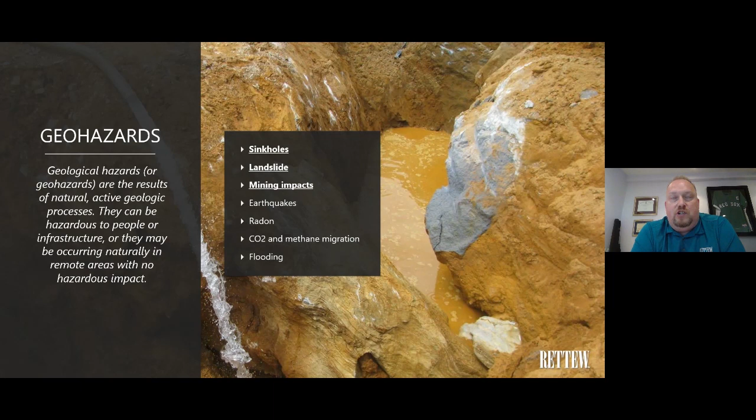And I am going to throw a fourth one in there, and that's inadvertent returns related to directional drilling. We are seeing a lot of regulatory scrutiny over that, so we are going to talk about HDDs and IRs as well. Next slide, Chris.

So why are we talking about this? Well, in typical fashion, we've got a lot of regulation that we've got to meet these days in relation to geologic hazards. Again, we're going to talk about Pennsylvania, Ohio, West Virginia, and some of the federal influences. A lot of this stuff comes out in Pennsylvania first, and other regulatory agencies tend to follow. So we are going to talk a lot about what we're seeing in Pennsylvania.

And we're seeing that in the ESCGP3 permitting process with geohazard mitigation plans. We've got the Pennsylvania Department of Environmental Protection's trenchless technology guidance. FERC has similar guidance. They call it HDD guidance, but it's very similar to the PA regs. Licensed oversight and the importance of geophysical evaluations when we're looking at some of these geohazards. Next slide.

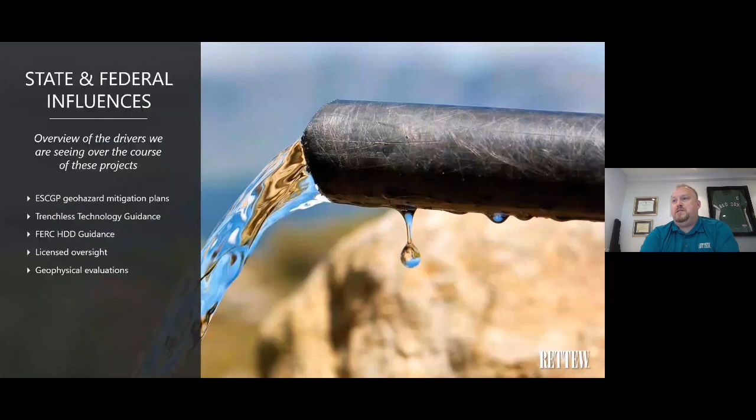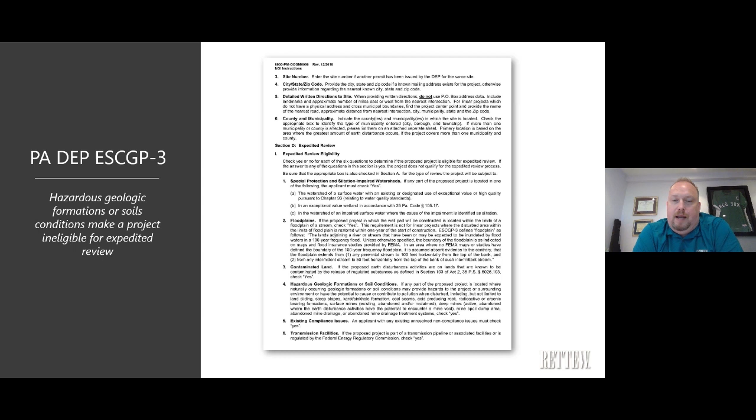So in the ESCGP3 permitting process, you start off with a notice of intent. Number 4 in that notice of intent is an evaluation of geologic or hazardous soil conditions. Slightly different language is used across this document in the FERC doc, but it's essentially the same. And in this section of the NOI for the ESCGP, we're talking about expedited review. And if geohazards are present in your project area, it's going to be ineligible for expedited review. And it's really hard these days to get most projects through the expedited review process because of all the issues we have to address. Next slide, Bricks.

Further on in the NOI for the ESCGP3, again, we talk about naturally occurring geologic formations or soil conditions, and DEP's asking you to evaluate those for your project area. If they are present, you need to include a geologic hazard mitigation plan with your NOI, and Bricks will talk a little bit more about that later. And they flat out say if you've got hazardous geologic conditions and you don't address them through the mitigation plan, just don't submit the NOI. So they're pretty blunt about that. Next slide, Bricks.

Again, I said we were going to touch on the HDD and inadvertent return piece. We're seeing a lot of this come through with current projects. Pennsylvania DEP has put out their trenchless technology guidance, and they're defining trenchless technology as multiple crossing methods that don't involve trenching. So HDDs, guided bores, auger bores, things like that. This guidance came out of a settlement between DEP and Mariner East 2 projects. It set up a stakeholders group to both look at alternatives analysis and the technical guidance for HDDs themselves. Next slide, Bricks.

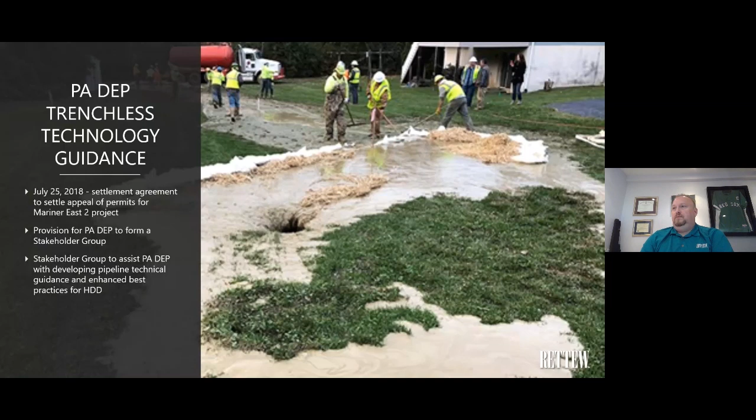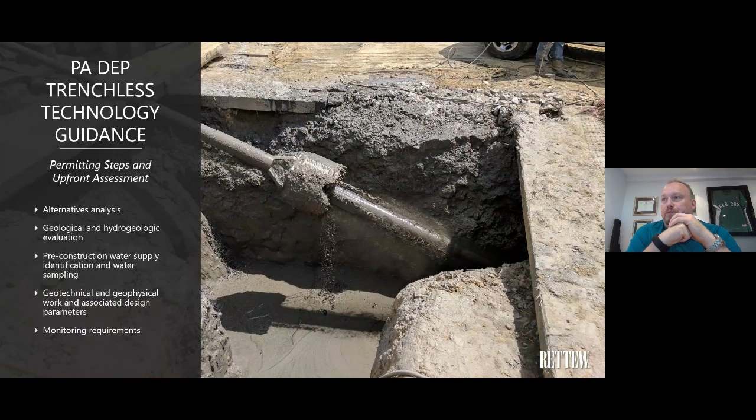So what are we seeing out of that document? Upfront permitting steps and assessment, heavy reliance on alternatives analysis, geologic and hydrogeologic evaluations, water supply identification and sampling, as well as geotech and geophysical work to kind of tie all that stuff in to the design of these. Felicia's going to talk more about the geophysical aspect of that, and Bricks the geotech, but a lot of emphasis on those items. Next slide, Bricks. Tying this in to the federal level, FERC has HDD guidance that they put out last October. It's very similar to Pennsylvania. Language is a little different, but same kind of upfront requirements. Next up, Bricks.

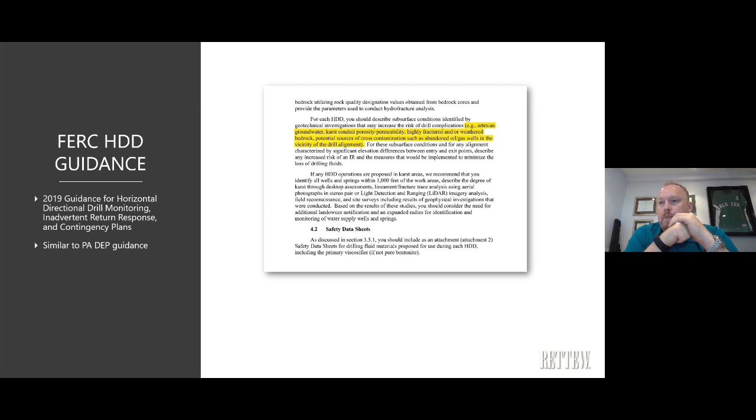One of the big things we've seen come out of this, it's not necessarily new regulation, but new focus on these items, is the involvement of licensed professionals. And we're seeing this at the state and federal level. They want to see professional geologists, professional engineers, geotechnical engineers involved in the construction aspects of these projects. Again, both at the state and federal level, we've had projects that require professionals to be on site.

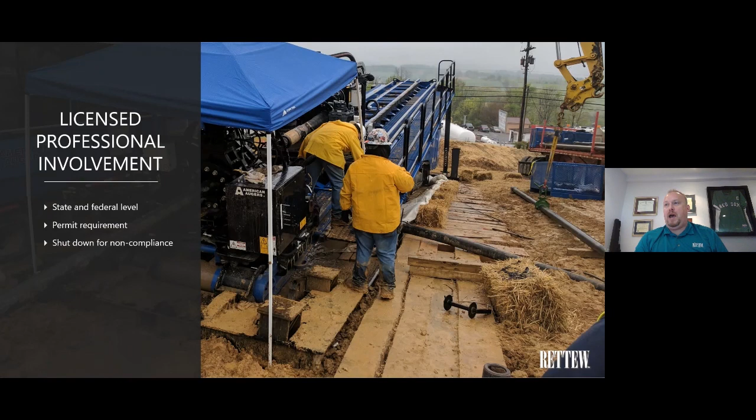We've even seen a case, it was a FERC case, where they required a PG or a PE to be on site. The FERC inspector came out. There was no licensed professional on site, and they shut the job down. So that's just something to keep in mind as we move forward from the permitting to the actual construction of these projects. Next up, I'm going to hand it off to Felicia Bechtel to talk about Karst Geohazards.

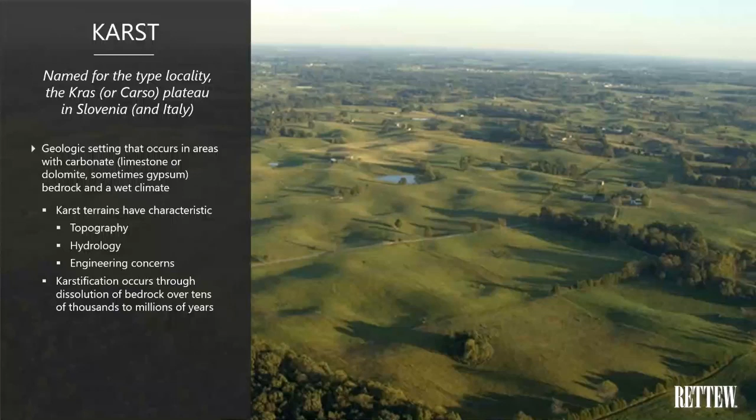And any of you on this webinar who are old enough to remember the Alka-Seltzer commercial of plop, plop, fizz, fizz, that's exactly what happens. Alka-Seltzer is calcium carbonate, and when you drop it in water, it fizzes away very quickly because it's designed commercially, but it fizzes away, leaving nothing behind. And that's what happens in a karst environment. Below the soil overburden, we have rock that's being dissolved by infiltrating water over thousands to millions of years.

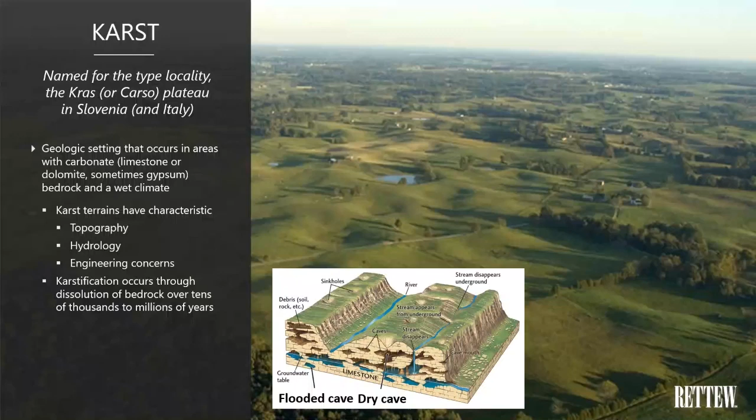or a cutaway of a sponge where over time you can get so much dissolution that you don't have just cracks in rocks that are slowly getting bigger. You can develop actual underground rivers. And this is the only situation when someone can truly realistically talk about underground rivers. They don't exist except in a karst type environment, and they can exist at all scales.

Next slide, please. So I show here a map of karst in the eastern United States, which is displayed by the black in the map. And since we're concentrating on primarily Pennsylvania, West Virginia, and Ohio in this talk, you can see that relatively speaking, there's not a whole lot of karst running through this area compared to the Midwest or the South.

However, if you look at the pop out to the right, you can see that karst, which is the beige bands following the Appalachian mountain chain, these beige bands actually intersect areas that are populated. So as we develop our cities and towns, we have to understand how to work carefully and develop carefully in karst environments. Next slide, please.

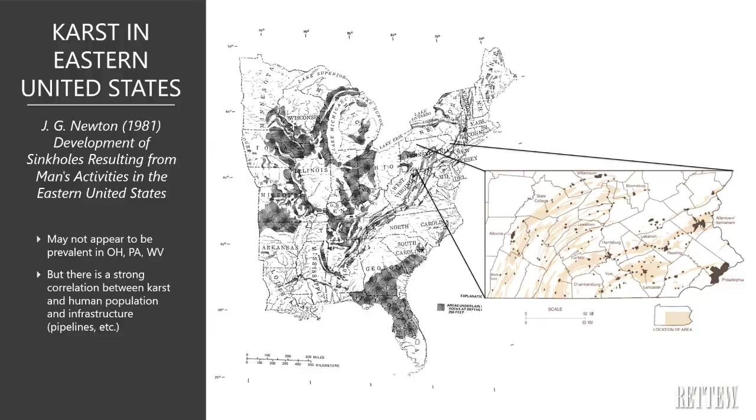So the process of karstification is actually a selective and positive feedback one. I have a cartoon for the first three panels on the left. One is just natural fractures in the rock. Rock gets cracked up, broken over time. And those natural fractures are tiny little water pathways. And over time, water flows through those pathways, dissolving the rock. Remember the Alka-Seltzer analogy, dissolving the rock and making a little cavity.

That little cavity can take on more water or more soil. So over time, as more water falls into that crack, dissolves more rock, the crack gets bigger, it can take on more water, and we have this positive feedback loop where we have more dissolution, wider fissures, and more through flow, eventually resulting in possibly an entire karst plumbing system. And this is a photograph from Kentucky, Karst Cave in Kentucky.

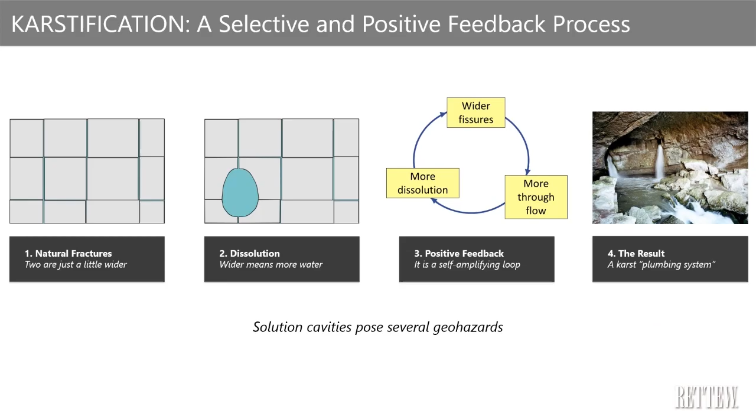Next slide, please. And these solution cavities pose several geohazards, one of them being rockhead pinnacles. So this is a picture here in Pennsylvania, the Ontelaunee Dam being built in 1926, and all of the soil burden was pulled away to develop this dam, leaving this very pinnacled rock surface. And the reason it's pinnacled is those deep fissures in between the rock pinnacles are the places where water got in and dissolved rock and made them bigger and bigger.

And they're so big, Chris can point out a couple of people for scale. These fissures are big. So you don't always have a nice, clean bedrock surface below the soil, even if you're in flatlands. So the soil overburden can hide a lot.

Next slide, please. This is a picture of a current day quarry in Pennsylvania where not all of the soil burden has been removed, but you can see the rockhead pinnacle tips sticking up. So I'm sure if the soil overburden were removed, it would look just like the picture that you see on the right from the Ontelaunee Dam. Next slide, please.

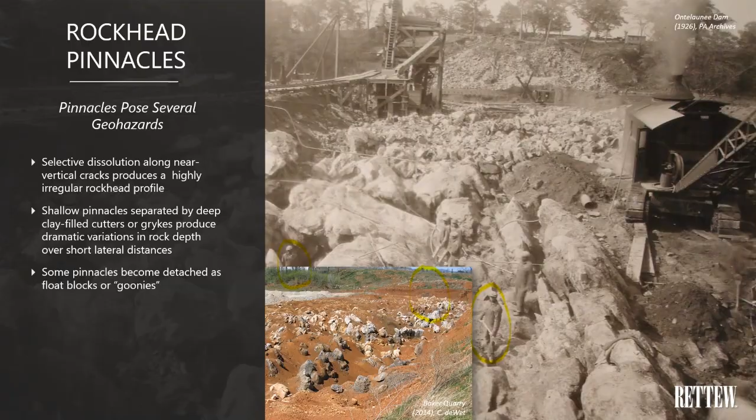So there are several geohazards that can develop as a result of karst, the first being subsidence, and these can occur in a number of ways, either by the soil overburden getting washed or flushed down through the cracks in the rock, or we can have caves developing from water infiltrating from a distance, caves developing under an area, and as the cave grows, the roof is actually growing towards or stoping

upwards towards the ground surface, and eventually there's not enough support of the soil overburden above the stoping upwards cave, and the soil and rock collapse into this underground cave. So there are a number of ways where subsidence can occur in karst environments.

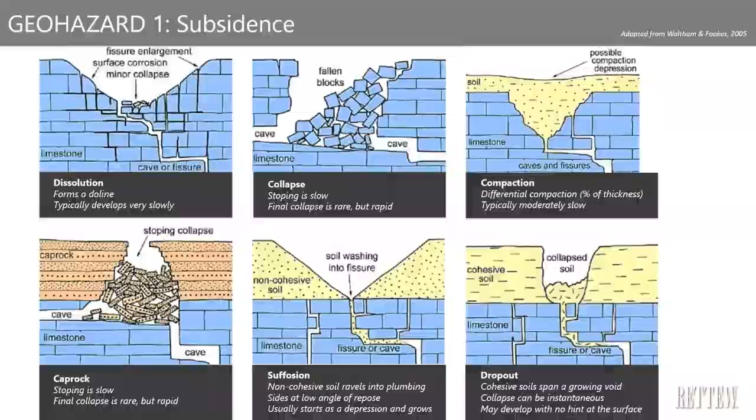Next slide, please. The second geohazard is groundwater contamination. In a karst environment, remember that water can travel fast over long distances very quickly. And this is very well illustrated in the case of Walkerton, Canada. Walkerton, Canada is a small town of about 5,000 people. And in May of 2000,

almost half the town population became seriously ill and several people died as a result of an application of sewage sludge outside the town boundaries, where normal groundwater flow calculated that it would take at least 30 days for water infiltrating at this place where they were going to apply the sewage sludge to get to the town wells.

They didn't realize they were on karst, so they applied the sewage sludge inappropriately, but unwittingly, and the people became very sick. So after the fact, they went back and did dye trace studies in wells in the area where they had applied the sludge, and there was a 26-hour travel time from a nearby well to the town well, whereas the dashed line that you see on the figure should have been the 30-day travel time from

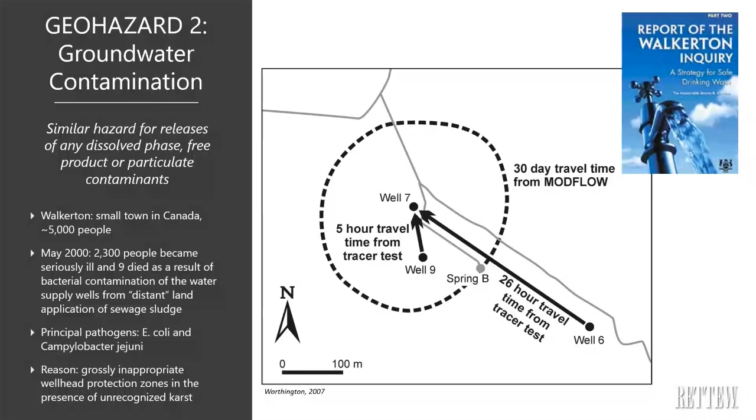Next slide, please. The third geohazard is in earth moving and support difficulties. You know, as we develop buildings, wells, all sorts of things, we're doing a lot of drilling into the ground. And if we are not doing that carefully or with enough understanding of the underlying karst environment, it can cause all sorts of problems.

We can do estimates from boring logs, how deep we think rock is, and as we drive a cast pile, we might hit a floater, or piles might dogleg on pinnacles, or if we're drilling shafts, we might go from a rock pinnacle into a water-filled void, into a rock pinnacle, into a clay-filled void, and we have very little understanding of that, except that you know to expect that when you're in a karst environment. Next slide, please.

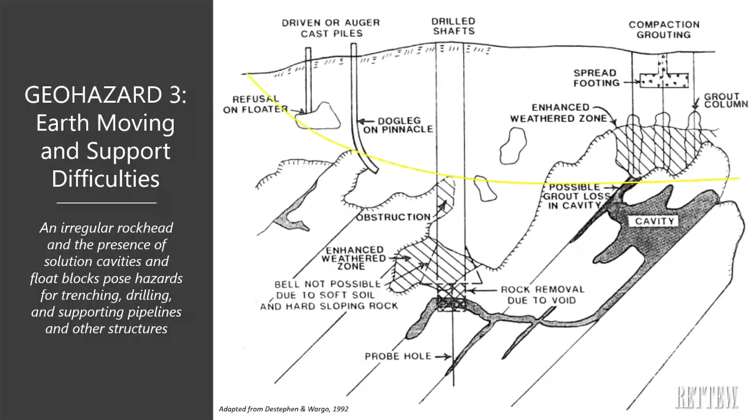We also have the same problem if we're doing horizontal directional drilling, which is the yellow line that appeared. As we do horizontal directional drills, we may hit all of these encounters. And similarly, next slide, please. If we're doing horizontal directional drilling, we may get inadvertent returns. So we're installing HDDs with drilling mud, but if the HDD crosses these fissures, the mud can make it to the ground surface and appear as an inadvertent return.

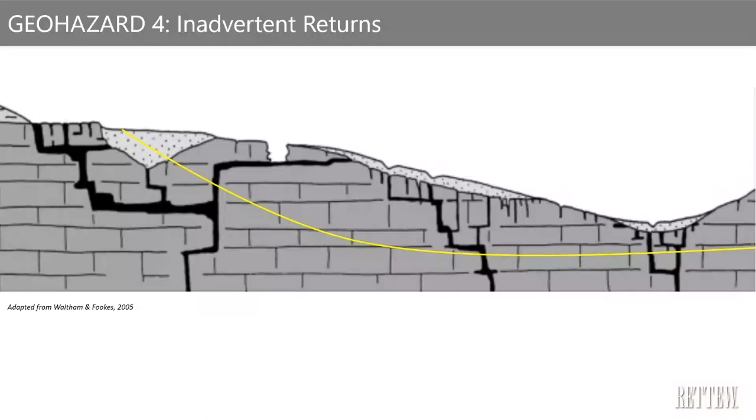Next slide, please. So in karst environments, there's a lot of uncertainty using conventional exploration, drilling wells, looking at rock cores. Here are two representative rock cores taken from a karst environment, with the soil overburden in red, the limestone rock in purple, and potential voids or fissures in black. And if we were to place these two borings side by side, whether they're 10 feet apart or

100 feet apart or 1,000 feet apart, we as scientists and engineers like to make interpolation between hard pieces of data. So we might draw lines and say, okay, well, this bed looks like this bed, and that's probably what's going on. But next slide, please. If you look at a coring in between those, we can see that we're, in some cases, dramatically incorrect. So conventional exploration does have a component of uncertainty in karst.

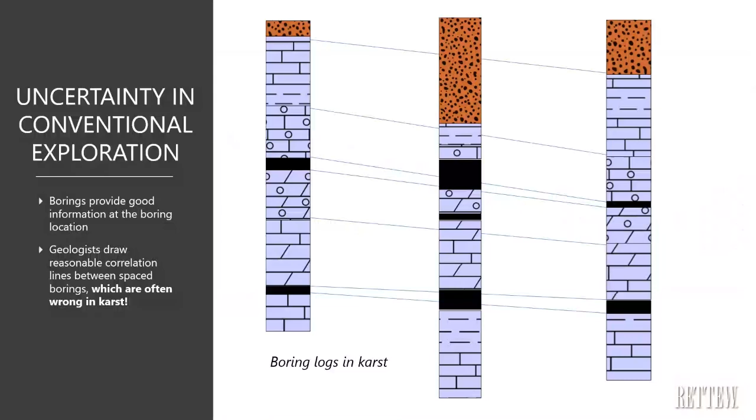Next slide, please. One of the things that we can do and should always do at the start of a project is desktop reviews. They're fast, they're cost effective, and they range from published geologic mapping and reports, karst feature databases, well log databases, historical aerial photographs, Lidar, fracture trace analysis.

I'm not going to go into any discussion of these because Chris Brixius is going to talk about this at a later time in the talk, but please know that they're out there and they should always be done at the start of a project. It can save you a whole lot of heartache in later stages of a project. Next slide, please.

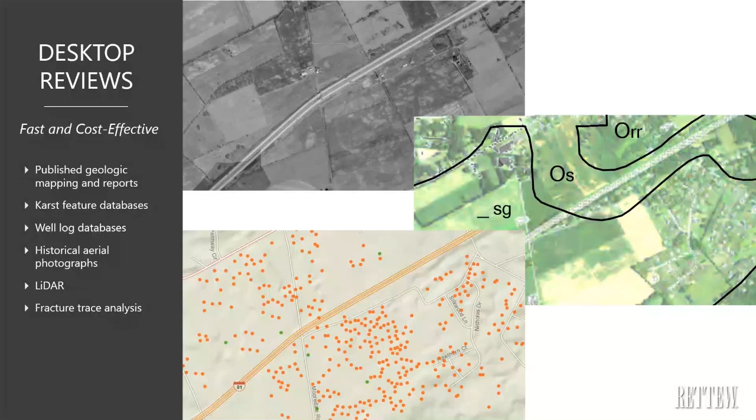Another technique that we can do, and this is my area of specialty, is geophysics, which is simply non-intrusive subsurface imaging. I try to relate it for people who aren't familiar with it as the earth science equivalent of medical radiology. We don't get the crystal clear picture, but we do get a sense of a fuzzy picture. We use a variety of techniques to look for targets underground that may be sensitive to the energy that we use in those techniques, so we can look for things like bedrock pinnacles or air or water or clay-filled voids underground.

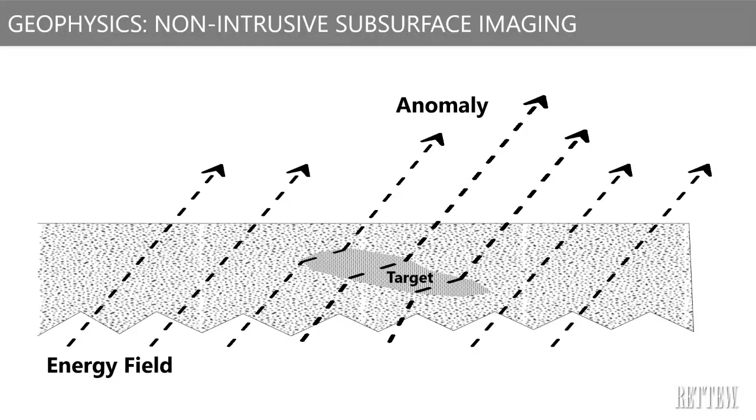Next slide, please. So there are 6 common karst conditions, and they really fall into 3 categories: a solution cavity below the top of rock, which is the left vertical panel, a solution cavity with infiltration, which is the center panel. So we've got water, we've got a solution cavity below the top of rock, and then we've got water somehow making its way into that solution cavity and carrying material with it.

And the last on the right is the solution cavity with dropout. We may not have water, but there's again a potential conduit to a cavity under the rock, and material can drop into it and cause eventual collapse. Next.

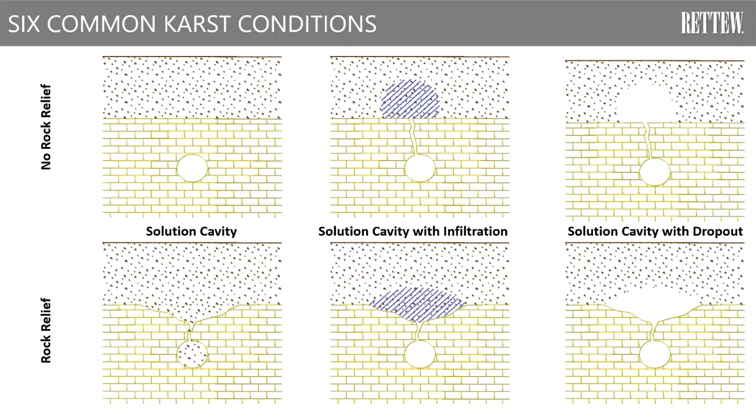So these 6 common karst conditions, depending on whether there's no rock relief, so there's a flat-lying bedrock surface with solution cavities underneath, or bedrock relief where we have the pinnacles that we described, and places where water can enter the underlying bedrock preferentially. There are a variety of geophysical techniques that we can use to look for these types of conditions. We can use microgravity to look for voids below the top of rock.

We can use spontaneous potential or electromagnetics or electrical techniques to look for places where water is infiltrating. So look for the water pathways that could lead to these. And we can use seismic and sometimes ground penetrating radar to look for areas of dropout. They may not have water moving, but they have material disappearing into underlying features.

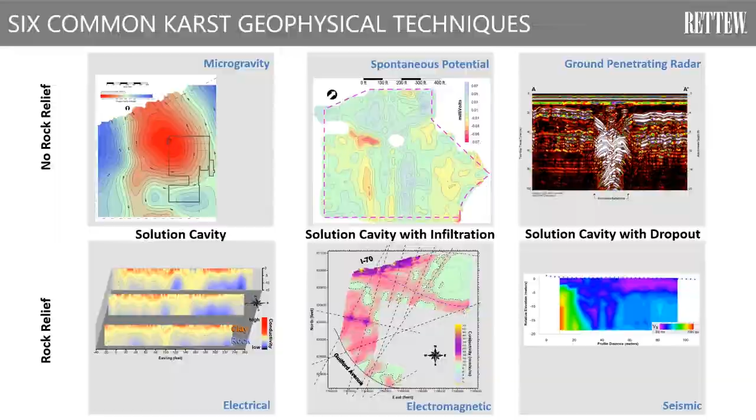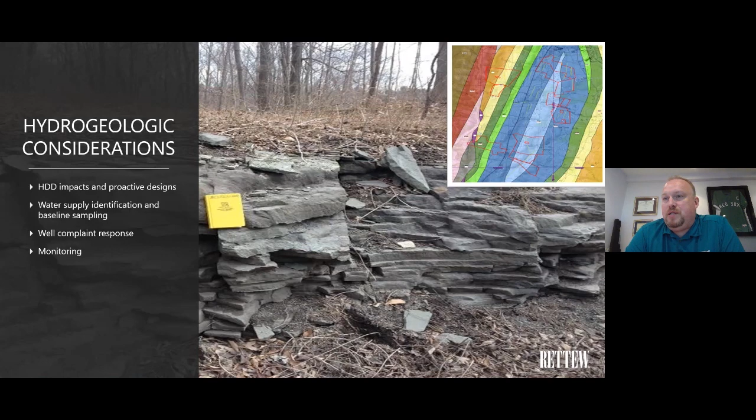So when we do a hydrogeologic evaluation, we do these for a lot of different types of projects, but the basics are the same. We're going to look at the geology and soils. We're going to look at the hydrogeology. We're going to look at water supplies and sample those before construction occurs. We're going to do fracture trace analysis.

Felicia talked about different types of geophysical evaluations we can do. Bricks will talk more about the geotech side of things. But really, we're doing all these things up front to develop a story, and that story is a conceptual hydrogeologic model that's going to help us later on when it comes time to design our projects. Next slide, Bricks.

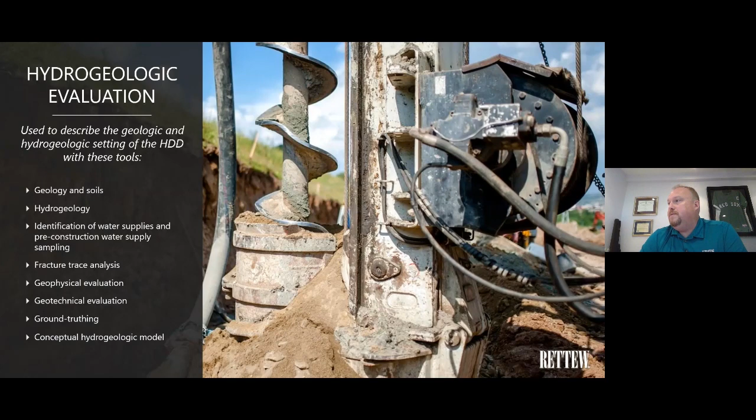So one of the big ones with respect to HDDs are identifying water supplies near your bore path. DEP and FERC guidance calls for a 450-foot buffer. That bumps out to 1,000 feet in karst environments for a lot of the reasons that Felicia just talked about. We need to identify public water supplies within half a mile and any surface water intakes within a mile downstream of a crossing.

We do rely heavily on the Pennsylvania Groundwater Information System when we're doing work, obviously, in Pennsylvania. It's not perfect, but it is a resource that we use pretty heavily when identifying water supplies. Big thing to note, construction-related impacts to water supplies are violations of permits and can result in fines. Next slide, Bricks.

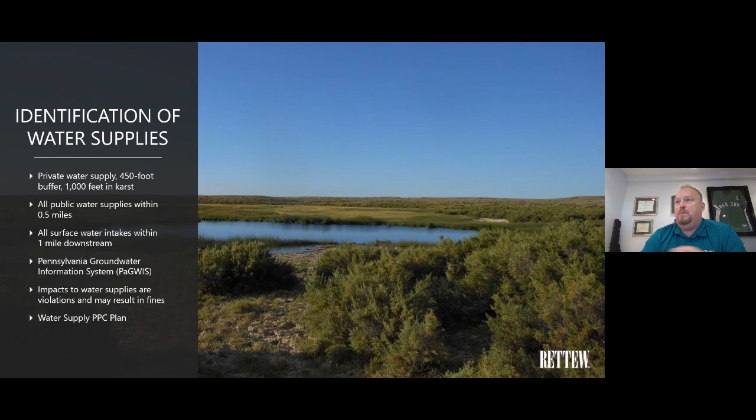So once we've identified water supplies within our project area, we're going to notify those landowners and let them know what we're doing and that we'd like to sample their supplies. We'll go out, purge that well or water source until we get stable field parameters, collect our samples, send them to a lab following a recommended parameter list, and we get the lab results back. We'll prepare a sampling and analysis report and give that to the landowner for their records. Next slide, Bricks.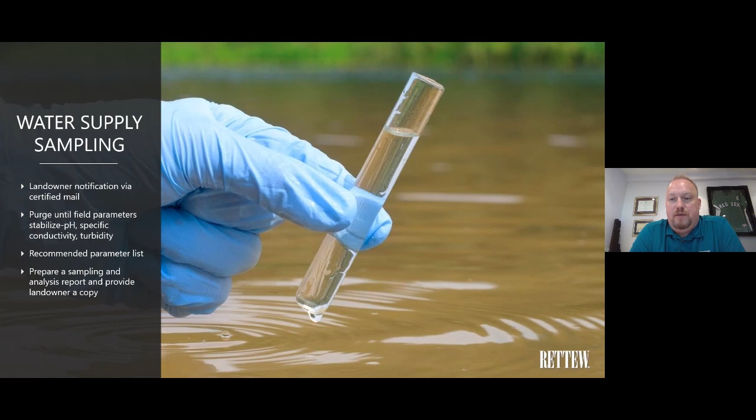So where it can get interesting is water supply complaints that pop up during active construction. Those must be reported. We'll typically set up a site visit, interview the landowner, talk about their well construction, talk about any history of water quality issues, whether a well's gone dry in the past, things like that. And we will collect samples again and send them to the lab for analysis.

This time around, we'll typically include XRD analysis for clay minerals, which in some cases can identify the potential for bentonite from drilling fluid. We'll compare those results with our pre-construction samples. And this is really a prime example of why we do pre-construction sampling. It gives us a baseline to compare to if there is a complaint later on.

And I would say 9 times out of 10, when we go out on a water supply complaint, it's going to come back to be not related to construction. It's going to be a pre-existing aquifer or well construction issue. And those things are often pretty easy to decipher when we do these well complaint reports.

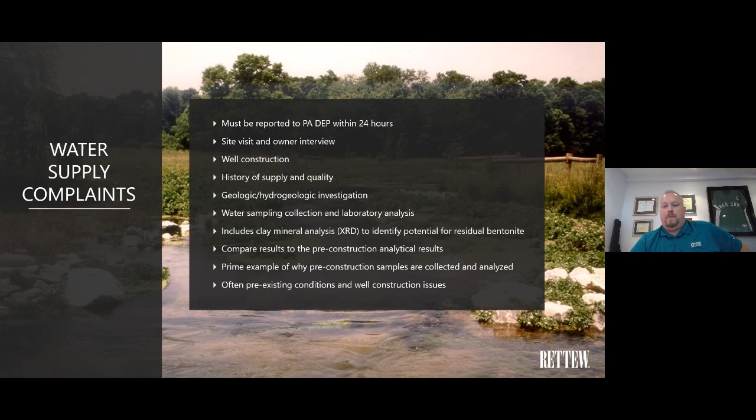Next slide, Bricks. So we've done all this upfront desktop field work, geotech, geophysics. What are we doing with that data? Well, we're using it to help design an HDD. We want to steepen entry and exit angles so we can get into the competent bedrock faster. Often we'll lengthen a profile to allow us to get some more depth to potentially avoid features that we've identified. We're going to rely heavily on data monitoring to look at things like fluid circulation and any losses of circulation. Next slide, Bricks.

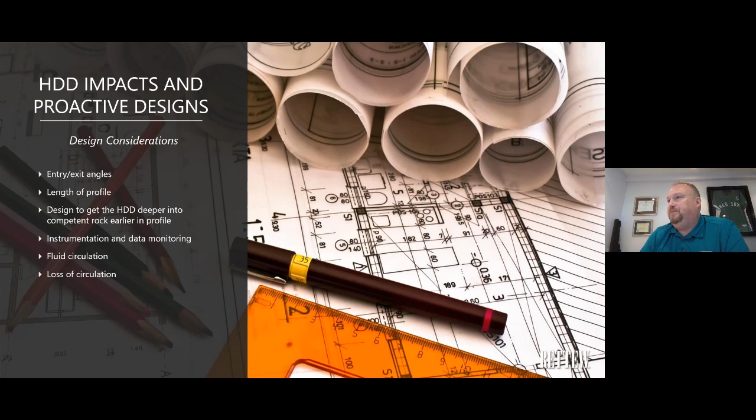So again, active construction considerations. We talked earlier about having licensed professionals on site. Again, we're seeing that as a permitting requirement, as well as pretty heavy daily monitoring and reporting, some of which has to go back to DEP daily. We've developed inadvertent return response and reporting plans.

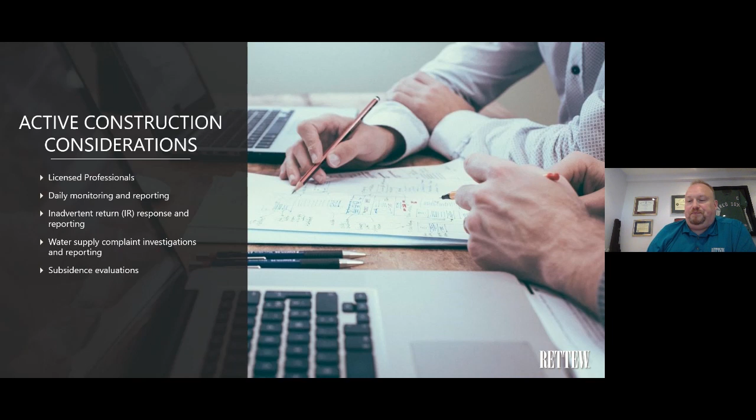Again, we talked about how we investigate water supply complaints. And then another big one are subsidence evaluations, where we've got subsidence features or sinkholes that might pop up during a construction project that have to be addressed. Next slide, Bricks.

So on the monitoring front, there's a lot of people out on the right of way, PGs, environmental inspectors, utility inspectors, other technicians. They're on foot, they're in boats, we're using drones to cover large areas. So one of the things we're using that upfront data for is to identify potential areas where we might have an issue. If we see something along an HDD path where there's some heavily fractured rock, or we're going through a heavily karstified area, we might put some additional people out on the ground to keep an eye out for IRs as we pass through troublesome areas.

And with that, I'm going to pass it on to Bricks to talk more about the landslide and mining impact side of this.

All right. So, as Felicia and Dave have touched on, there are requirements for a lot of midstream and upstream projects, especially in Pennsylvania, for a geohazard mitigation report. We have also titled these naturally occurring geologic assessment reports to match the language in the permits. That report itself will cover a desktop evaluation of any available geologic resource that is out there, but also include a field reconnaissance that will highlight any of the things that we find during our desktop research and then any observations in the field.

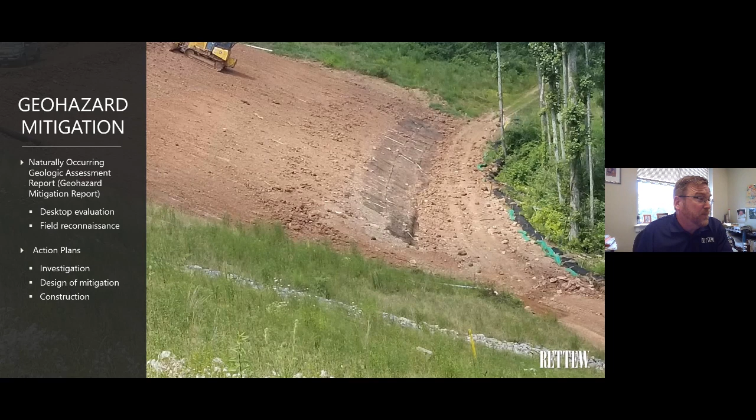And then the final step is construction. We're gonna be preparing construction plans for most projects with details and notes, but then we're gonna want to be in the field to guide that landslide repair, for example, with a qualified inspector that's going to monitor how things are occurring and make sure that they adhere to our plans. So let's back up to the first step.

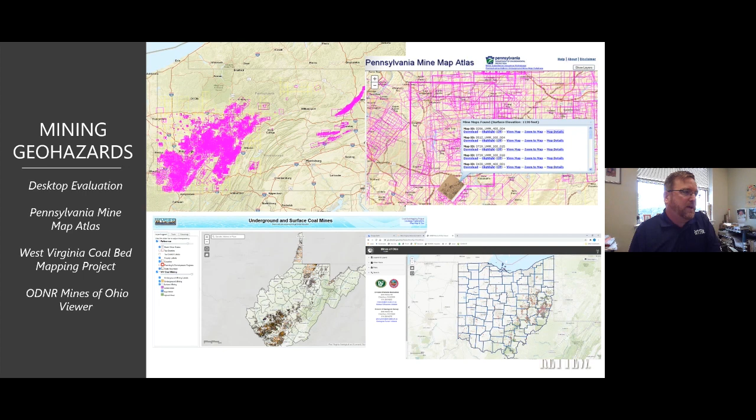So we're going to use these resources for projects, and we're going to look for what available maps there are with regards to mining. The old maps from the early 1900s are in these resources, but also there are newer maps of filed permits for longwall mining that are going to happen in the future. So that's very helpful to see those things where they underlie your project.

The most common thing with surface mining, we might want to take a look at where we're expected to see coal seams. Some of the lithologic maps out there show where you have the thinner coal seams where they might outcrop at the surface. So when we're designing any project, we're going to want to prevent any acid mine drainage or arsenic issues by managing any of the surface or subsurface water on a project with relation to where you might expect any of these coal seam issues.

Also out west, you have a lot of coal spoil piles in certain areas. So if you have an alignment that's running through a known coal spoil pile, we're probably going to want to take some tests of that material to see what the pH is and what is the risk to not only the pipeline, but also if there's water moving through that project, is it going to be a problem with acid mine drainage?

If you're going to be excavating through a known seam, or you find something when you're excavating, or you expect it, you might want to be permitting the removal of that coal for economic considerations. But a lot of times you don't really have stuff that's very economic to remove, and we will be putting on our plans maybe a detail as depicted on the screen here, which is a storage pit where we're making an allowance for encapsulating coal spoils on site using a compacted clay or geotextile as a barrier.

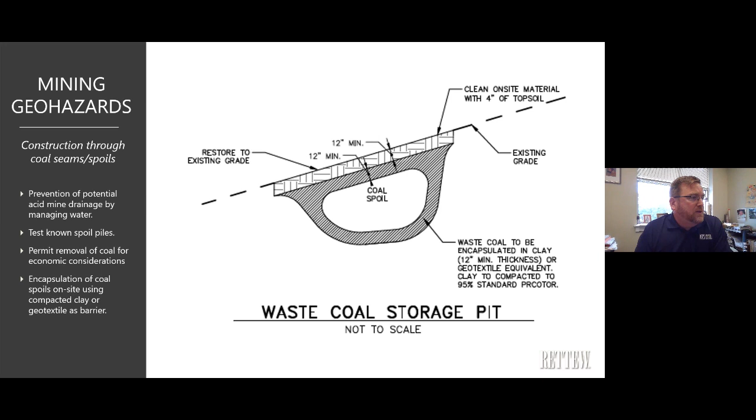The underlying geology is flat-lying beds of claystone, shale, and siltstone, which weather to very fine-grained soils, which interact with the steep slopes that are in this region due to that same geology. But also you have heavy precipitation. You have winter snows and snow melt, along with a lot of spring and summer thunderstorms that roll through this region. So when you have all of that water intersecting with steep slopes and fine-grained material, you have a recipe for landslides,

as opposed to, say, the Pacific Northwest, where you have rain, you have steep slopes, but you don't always have the same fine-grained clay soils that are widespread as they are in our region. In fact, this is not a new thing. Monongahela, one of the three rivers in Pittsburgh, is derived from an American Indian word that is translated as river with the sliding banks. So even the Indians knew what they were encountering in this region.

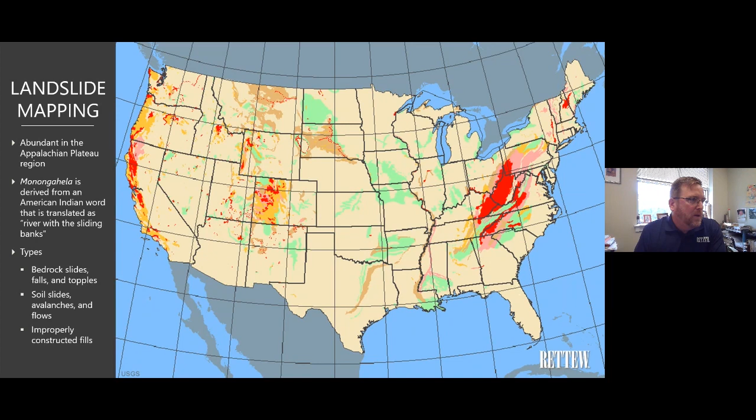When we're evaluating a landslide for the first time, we're going to be looking for these features, and if we dig a test pit, we're also going to be looking for where this is located, because this helps us during the design process of how do we want to fix this problem. So we're going to want to design through where these slip planes are encountered.

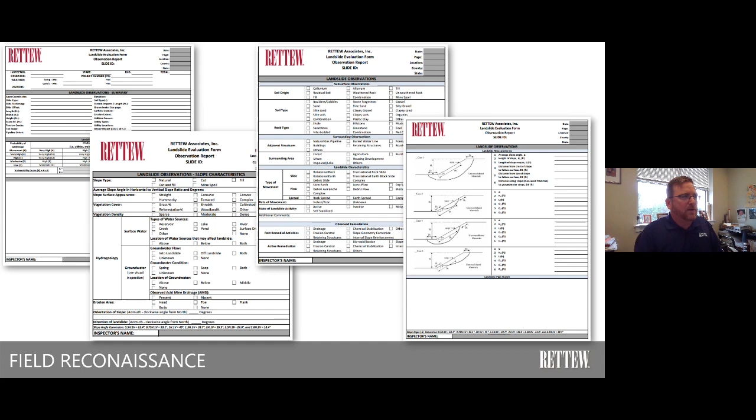If we're doing a lot of landslide evaluations, we have a little numerical rating system. So if we have 100 slides we're looking at, we're going to rate them in order. So the client will want to repair the ones that are worst rated first.

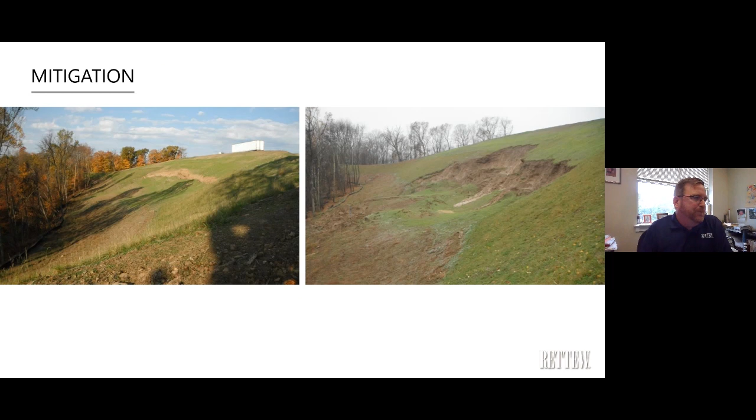So as far as the mitigation process after a first initial field evaluation, one of our next steps is to begin with an existing condition survey. And typically we like to get out there with a drone survey because it's very cost efficient to do so. You can take an existing photo and see how things stand at one point in time.

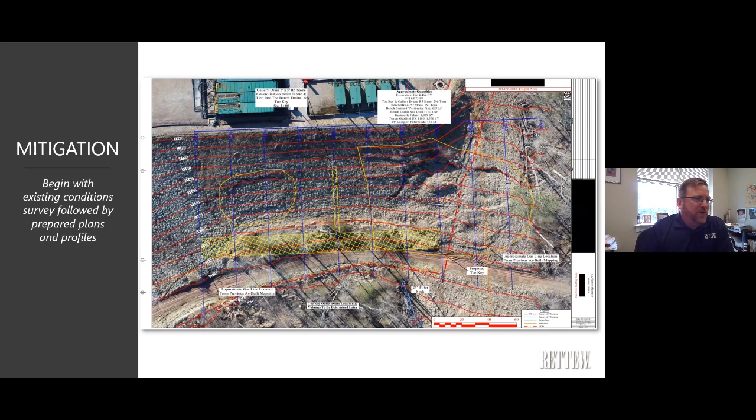You can prepare the plans based off this survey, and then we were going to prepare profiles every 25 or 50 feet along that project. So we're going to prepare cross sections, and either through test pit data or test boring data, we're going to develop a subsurface profile and the strength of those materials, the parameters that go into the geotechnical design, including friction angle, cohesion, unit weights.

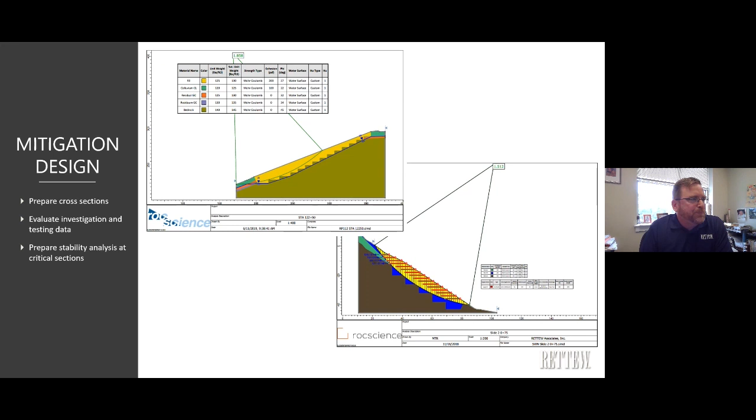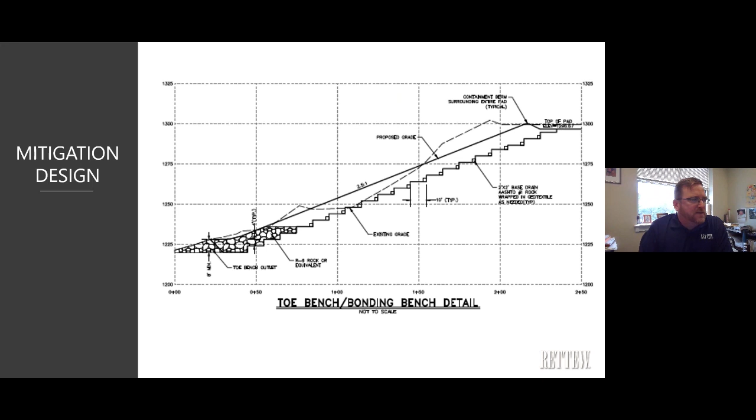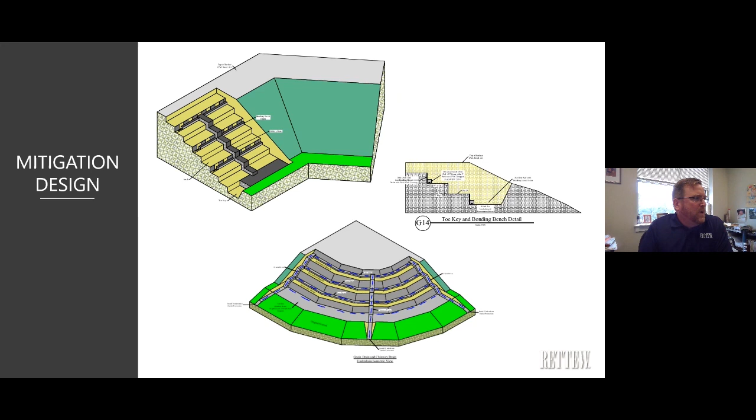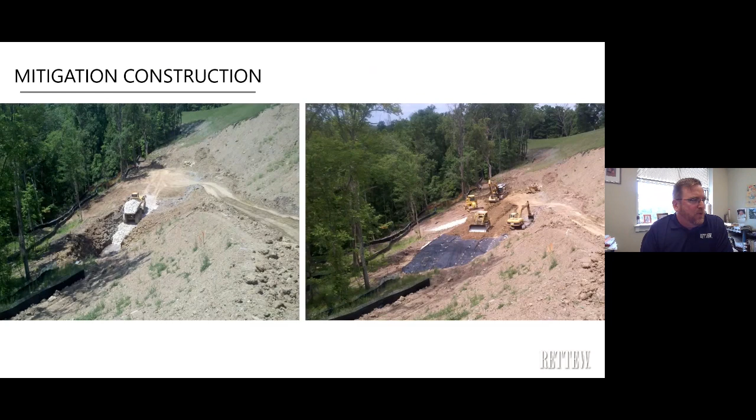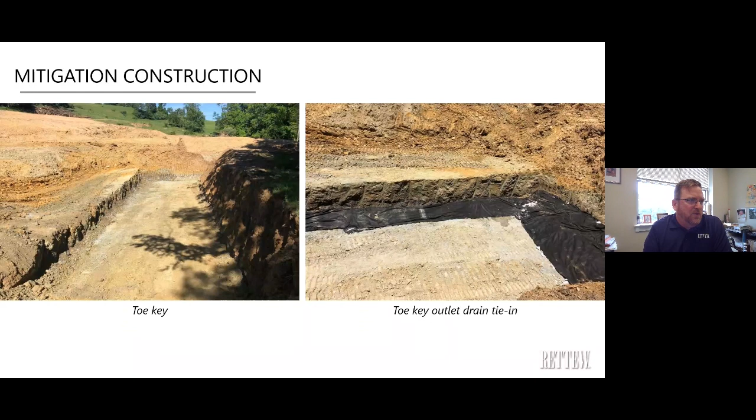It is very important. It's got to be founded on competent rock or very stiff, hard residual soils. We're going to want to excavate through all the colluvium that is there. We're going to want to put a toe key outlet and drains in the back end of not only the toe key but benches that are going up the hillside. The next photo on the left shows one of the benches moving up, but on the back end of that slope you have a bench drain with a site drain at the back of the slope, with the intent of collecting all water that's moving laterally through that area.

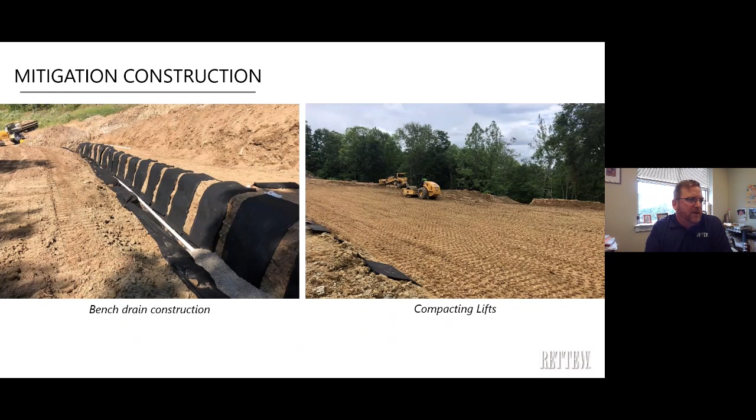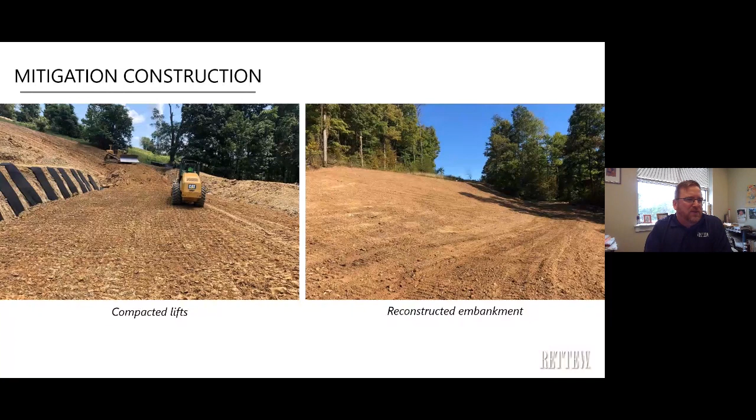And then the photo on the right shows typical compacting lifts as we're moving up the hillside with a sheep's foot roller. Our inspectors will density test these soils so that they meet the specifics of the design that we prepared. And you continue moving upwards, compacting the lifts, and at the end of the day, you'll have a reconstructed embankment. To be honest, this one doesn't look very steep, but it also highlights that if you have a lot of water and fine-grained soils, it doesn't take a very steep slope to cause a landslide.

Very difficult: pipeline alignments in West Virginia and southwestern PA typically go down through some steep terrain. This landslide occurred on one of those areas next to a stream. Due to the steepness, we needed a geogrid design in there to assist with the stability of the slide. So we're going to have to be in some very inaccessible areas sometimes to get this done.

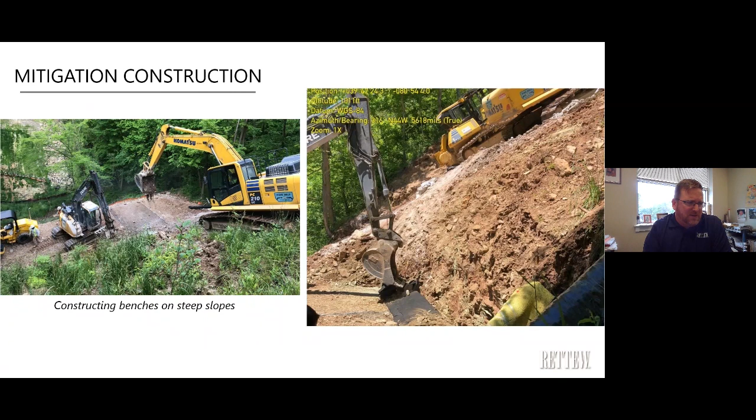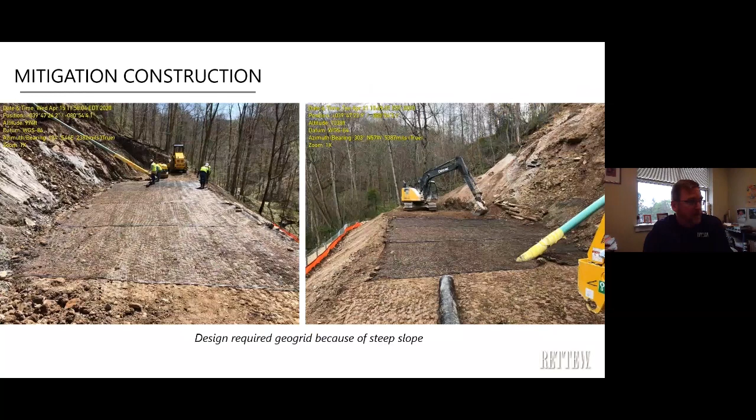In addition, these photos show the geogrid being placed on the benches as they're going up the hill. In the back there, you'll see an existing pipeline that we're protecting around too. So we have to take all of that into consideration. You'll see on the back end of the slope, we're benching this one back into bedrock.

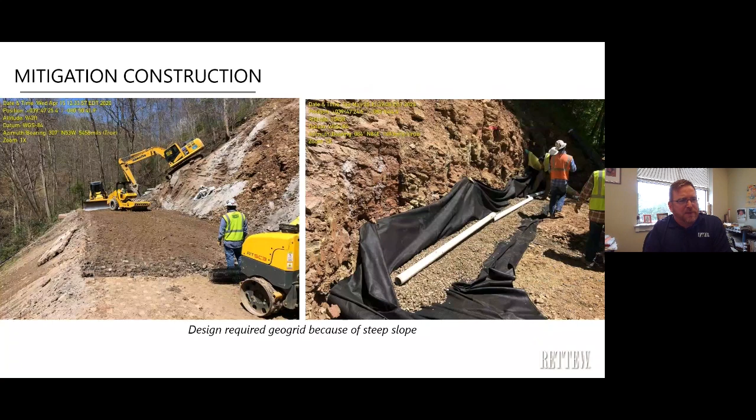And just continuing with this construction, we're moving up in lifts with soil, and then on the photo on the right, you'll see some drainage at the back end of that slope. So the key to all of this is putting in drainage, making sure that the benches are under compaction control, and if geogrid is needed, that is also in place.

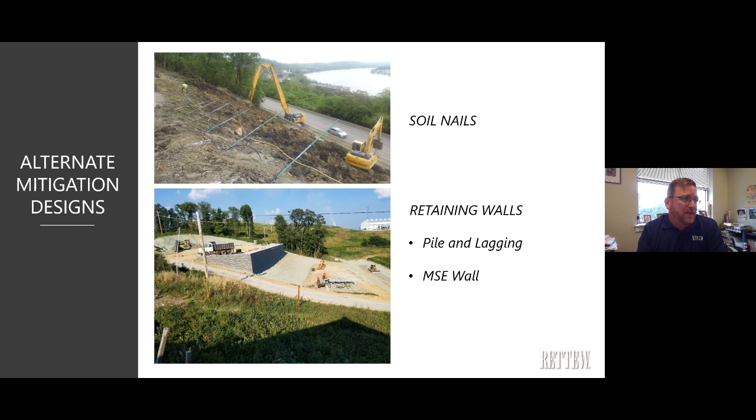In general, these alternates are usually a little more expensive than the standard benching and grading schemes that I showed on the photos there. So, economic considerations are always what we take into account with our designs and how we are providing recommendations for these repairs. That pretty much ends that very quick and fast discussion on landslide repairs. There's obviously a lot more that can be said about it.